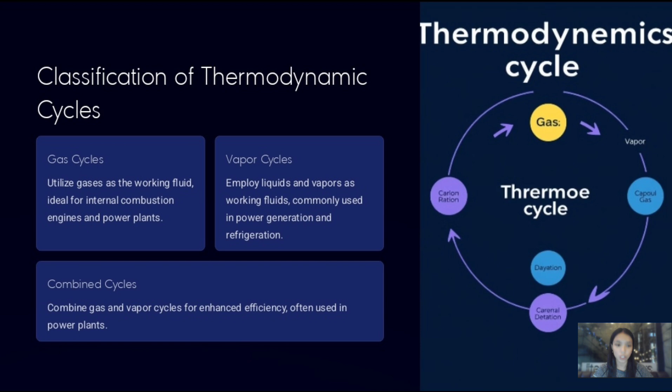A Carnot cycle is defined as an ideal reversible closed thermodynamic cycle composed of four processes: isothermal expansion, adiabatic expansion, isothermal compression, and adiabatic compression. First is the isothermal expansion.

Heat is absorbed at constant temperature, increasing volume and work output. Here, heat is absorbed but at constant temperature. This causes the gas to expand and do work. So the gas gets bigger because it absorbs heat while staying at constant temperature.

Second is adiabatic expansion. Here, no heat exchange occurs, temperature drops, and work is done by the system. No heat is added or taken away. The temperature drops and the system does work using its own internal energy. The pressure decreases or the volume increases. Here, the gas gets bigger without taking in heat.

Isothermal compression: heat is released at constant temperature, decreasing volume and work input. Here, heat is released at constant temperature. This causes the gas to get smaller, and work is done on the system. It involves decreasing the volume or increasing the pressure of a gas while temperature stays constant. Isothermal compression work is the minimum amount of work needed to compress a gas, and it can only be achieved in a system that changes in what is called a reversible fashion.

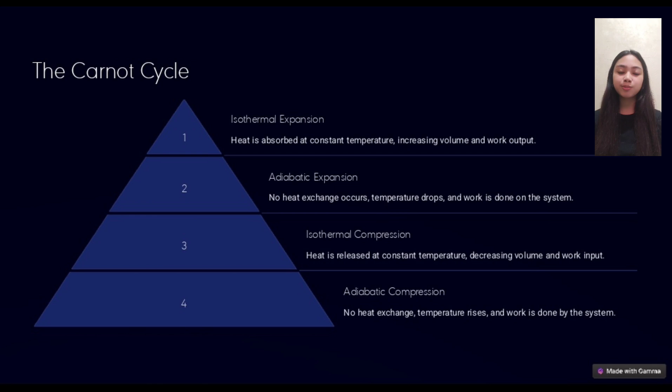Next, I'll be explaining the Rankine cycle. The Rankine cycle is a fundamental thermodynamic process used in power generation, especially in steam engines and power plants.

The cycle involves four key components: the boiler, turbine, condenser, and pump. Let's go step by step. Step 1 is the boiler.

Here, water is heated under high pressure, turning it into steam. During this process, the water absorbs energy from an external heat source, which could come from coal, natural gas, or renewable sources like solar thermal energy. The pressurized steam produced here is what drives the rest of the cycle.

Next is the turbine. The high-pressure steam generated in the boiler expands through the turbine blades. As the steam expands, it loses energy, which is converted into mechanical work. This mechanical work can then be used to drive generators that produce electricity. So the turbine is where the magic of mechanical energy production happens.

After the steam leaves the turbine, it enters the condenser. Here, the steam is cooled and condensed back into liquid water by releasing heat to a cooling medium, such as water or air. This process reduces the steam's volume and pressure, making it ready to be reused in the next step.

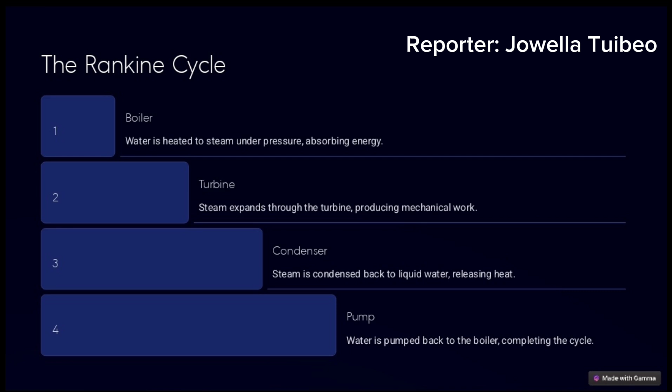Here, the air is compressed. This compression increases the temperature and pressure of the air. This process is called an isentropic process, meaning no heat is exchanged and work is done on the system. The second stage is the combustor.

The compressed air is injected with fuel which causes ignition. This ignition adds heat to the system at a constant pressure, increasing the temperature of the air. The third stage is the turbine.

The hot gas produced by the system expands in the turbine, causing it to rotate. This rotation generates mechanical power which can be used to drive a generator or other machinery. This process is also an example of an isentropic process, and work is done by the system.

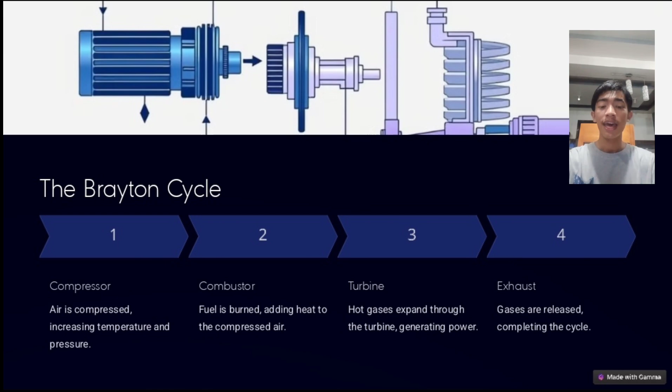This cycle, the Brayton cycle, is commonly used in gas turbine engines. Brayton cycles are used in various applications, including gas turbine engines for aircraft, power generation, and industrial processes. That's all, thank you.

Refrigeration cycles: this is composed of the evaporator, which has a refrigerant that absorbs heat from the cold space while evaporating. The refrigerant is a chemical that absorbs heat in a refrigeration system.

And the compressor: refrigerant vapor is compressed, increasing its temperature. In the compressor, the temperature of the refrigerant increases.

Then the condenser: the compressed refrigerant releases heat to the environment while condensing. So after being compressed in the compressor, it will then go through the process of condensing in the condenser, which releases the heat absorbed by the refrigerant to the environment.

And then the expansion valve: refrigerant pressure is reduced, allowing it to absorb heat again. In the expansion valve, after the absorbed heat is released and after it is compressed and condensed, the pressure is reduced and it is allowed to absorb heat again.

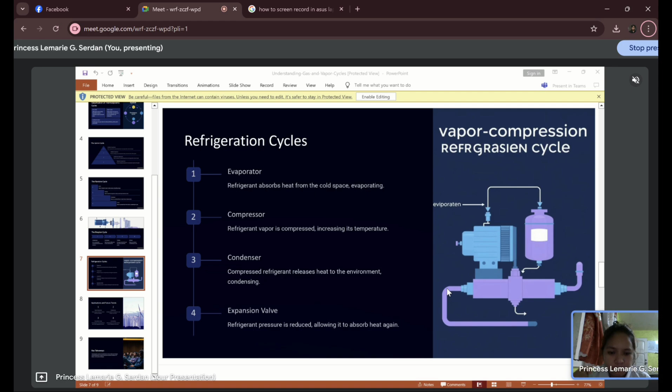Power generation: steam and gas turbines are vital for electricity production. As stated, steam and gas turbines are vital for electricity production because here in the Philippines, we have power turbines that convert wind to electricity, which is essential for people near that area.

In addition, refrigeration: cooling systems are essential for food storage and comfort. Refrigeration is very essential for us because it preserves food, something connected to scientific studies. Refrigeration is a big help for us because it preserves things, so we have things we can harvest in the future because of refrigerating certain items. So refrigeration is very essential.

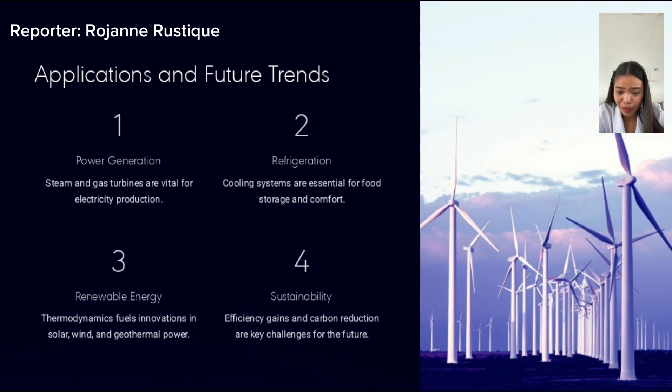Cooling systems are essential for food storage and comfort.

That's all. Renewable energy such as solar, wind, and geothermal is a clean and eco-friendly source of electricity. It does not run out, so it is more sustainable compared to fossil fuels like coal and oil.

Thermodynamics is a science used to improve the performance of renewable energy systems, making technologies more efficient and easier to use in daily life.

Next is sustainability. Sustainability is about balancing progress and caring for the environment. We now use green technologies such as electric cars and energy-efficient buildings, which reduce pollution and carbon emissions. These efforts are made to ensure that we live on a healthy planet for future generations.

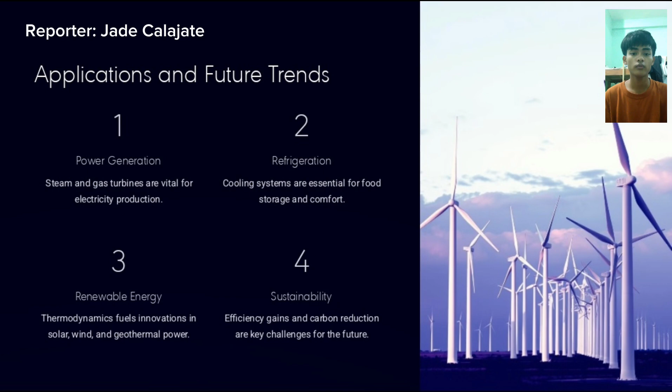Key takeaways: thermodynamic cycles are foundational to many modern technologies. Understanding these concepts empowers innovations and helps us address critical global challenges. Thermodynamic cycles are very important, especially now in modern technology, and by studying this, we can find solutions and help our country become more developed. That's all, thank you.